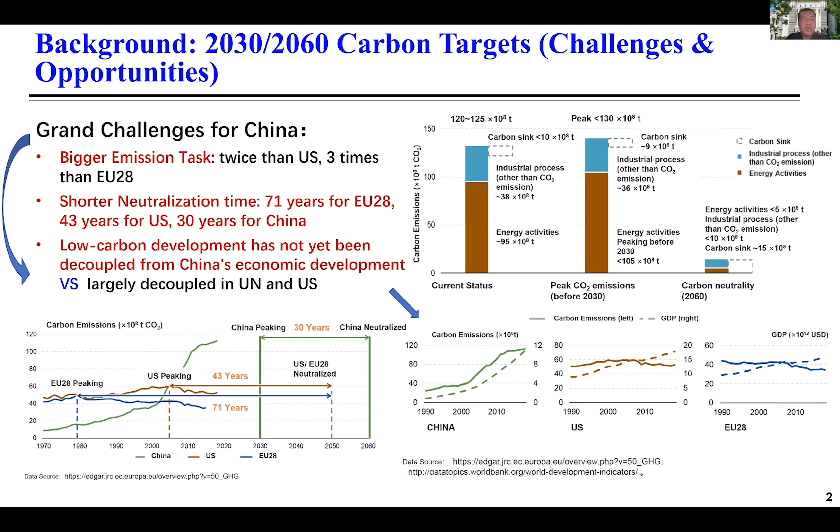The second challenge is the health and pressure issue. Due to the COVID-19 pandemic era, this has become a top trigger for the global building industry, and IEQ plays an important role in human health. Even now, Omicron is still an important issue for us.

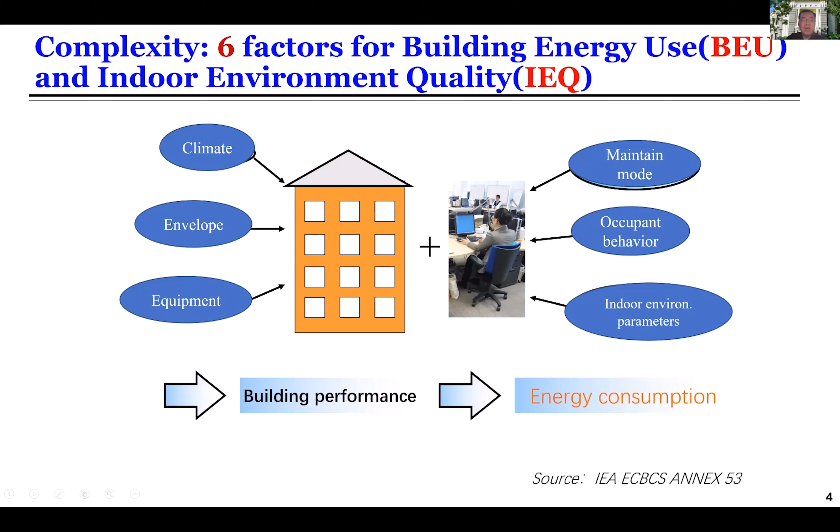So with these two targets, if we consider building energy use as well as indoor environment quality, it's a very complicated problem. With the IEA Annex 53, there are 6 factors, including climate, envelope, equipment, maintenance mode, occupant behavior, and indoor environment parameters. But in fact, it will be more complicated.

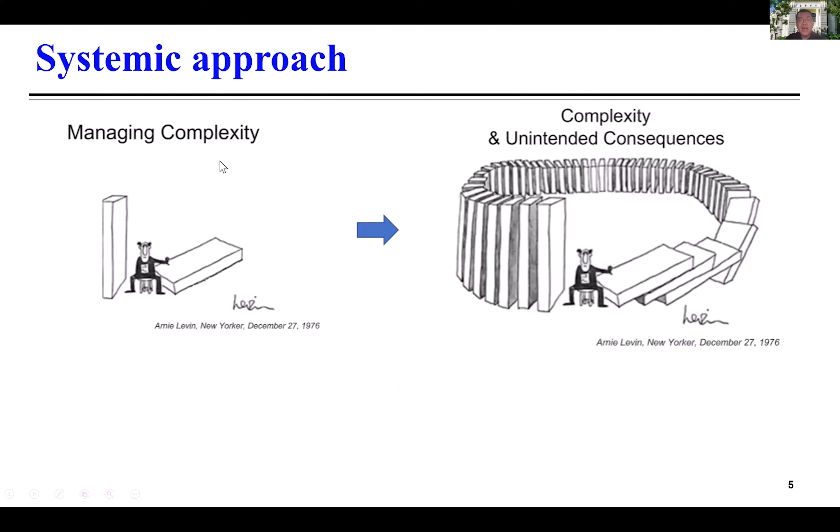So maybe we need a systemic approach. We need to manage the complexity and consider the unintended consequences. We need scientific thought: every system must have a structure, and the system structure determines the system function. We need to use this idea to solve building performance issues.

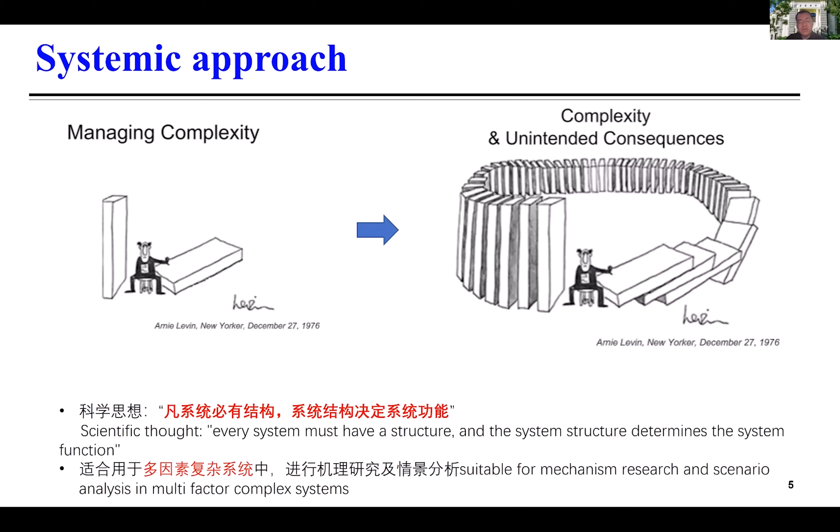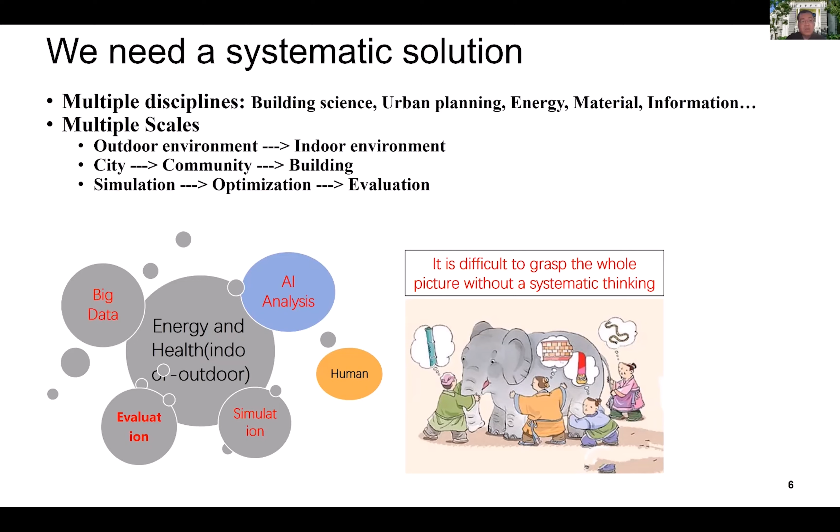So what we can get from new technologies: firstly is AI - advanced search engines and recommendation systems, understanding human speech, self-driving cars, and automatic decision making in the highest level strategic systems. Maybe we can use these advanced technologies to improve building performance from the beginning, from design to operation.

Secondly is big data technology. We can analyze the world based on massive data, which means maybe we can understand the behavior behind the data and understand how to optimize the performance in the operation phase.

The third one is sensor technology. The world is sensing at every moment. In the past 5 years, there have been more and more sensors to collect environmental data as well as energy consumption data, so we can use these sensors and data to optimize performance.

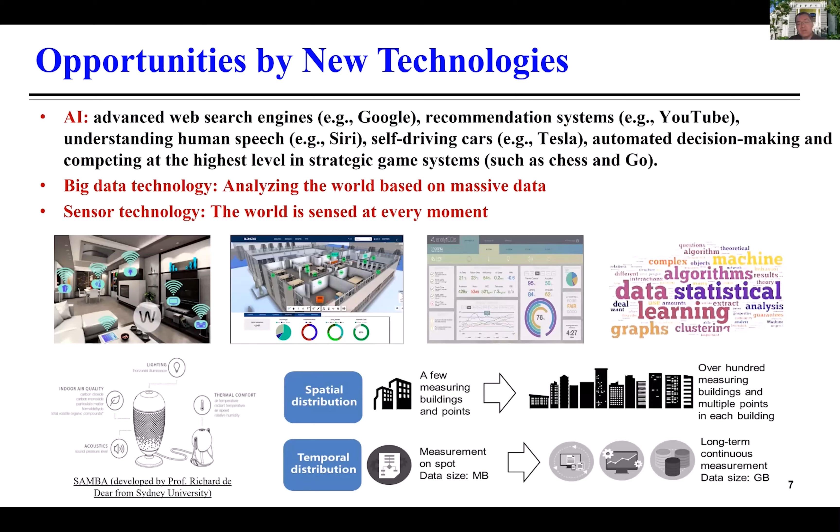With my team, there are some research findings supported by the government. First is green building design optimization methodology, algorithm, and platform, supported by the Chinese Ministry of Science and Technology. Second, we cooperated with UCL on a Tsinghua-UCL joint project supported by NSFC and EPSRC, on the topic of total performance of low carbon buildings in China and the UK.

The third one is research and application of post-occupancy evaluation of green buildings' actual operation performance, also supported by MOST. So today, what I want to show you is from building design to building operation, we want to introduce intelligent solutions to optimize performance with simulation, with AI, with data mining, something like this.

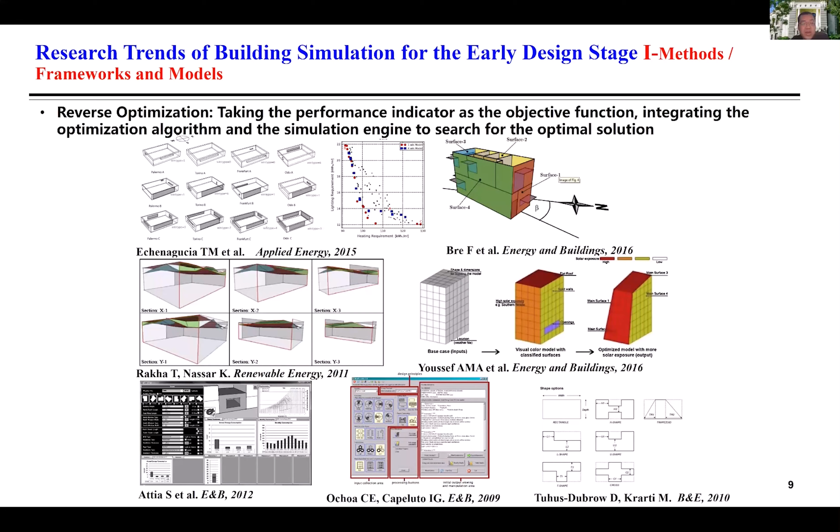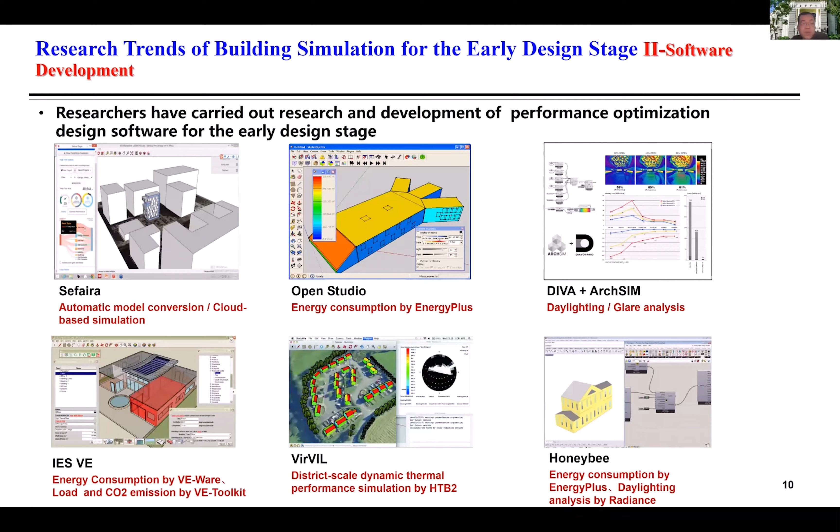That means simulation is integrated from the beginning of building design, the early stage. To summarize, for design, more and more architects began their design in SketchUp and in Rhino. There are many plugins for performance analysis integrated, and the conversion modes will change in the near future, and the requirement for hardware will be higher and higher.

However, we still think there are some challenges, such as how to trade off the fast uncertainty from the beginning of building design, and how to build a uniform design platform, something like this.

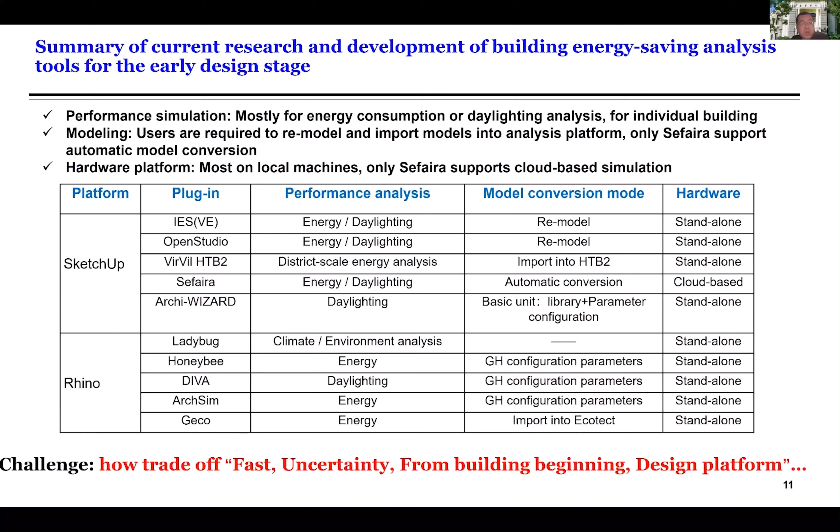So our research is, we think building model space recognition is a key problem. Considering current research, there are 4 types of algorithms. First is the graph and feature-based building space recognition algorithm. Second is the geometric calculation algorithm. Third is the algorithm based on domain-specific knowledge. And the last one is the transition from 2D to 3D.

We evaluated their performance from 2 aspects: first is accuracy, second is speed. With this understanding, we carried out our solution. That means to meet the big need for an algorithm that is good at both geometry recognition accuracy, as well as recognition efficiency.

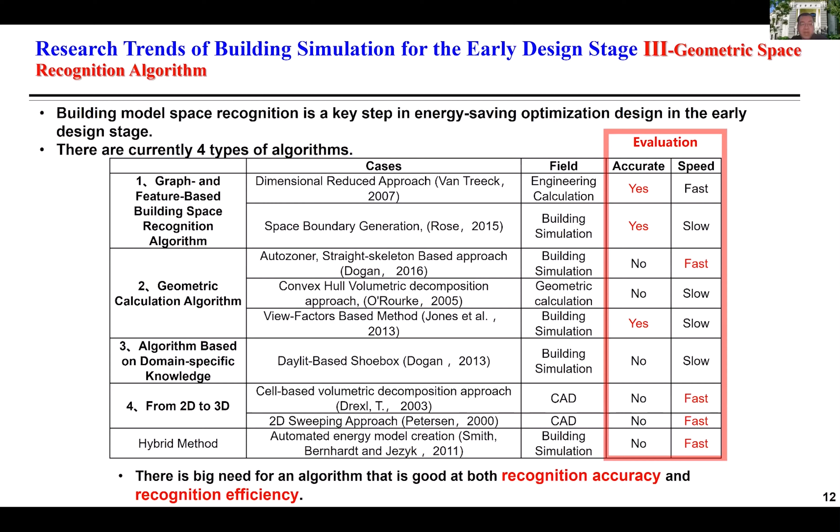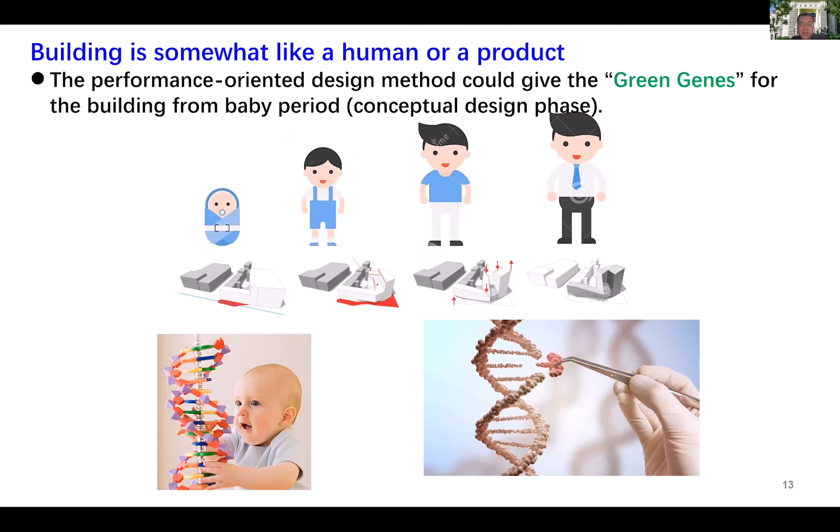With our understanding about building performance design, a building is somewhat like a human or a product. The performance-oriented design method could give the green genes for the building from the baby period, that means from the early stage, such as the DNA design. So what we want to control and optimize is the DNA of the building's performance.

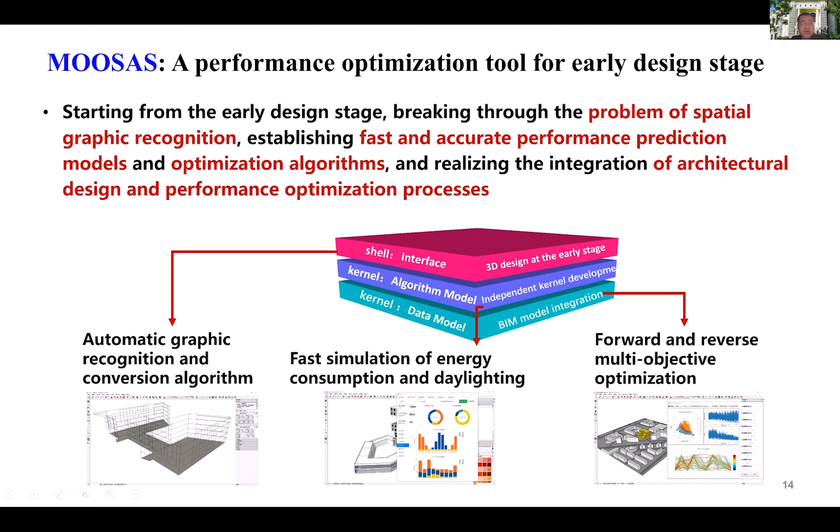So we carried out research to develop a software named MOOSAS. It's a performance optimization tool for the early design stage. There are 3 important features for MOOSAS. Firstly is the automatic graphic recognition and conversion algorithm. Secondly is the fast simulation for energy consumption and daylighting, and recently including ventilation. And also there is reverse or forward multi-objective optimization approach. I just want to show you some main features.

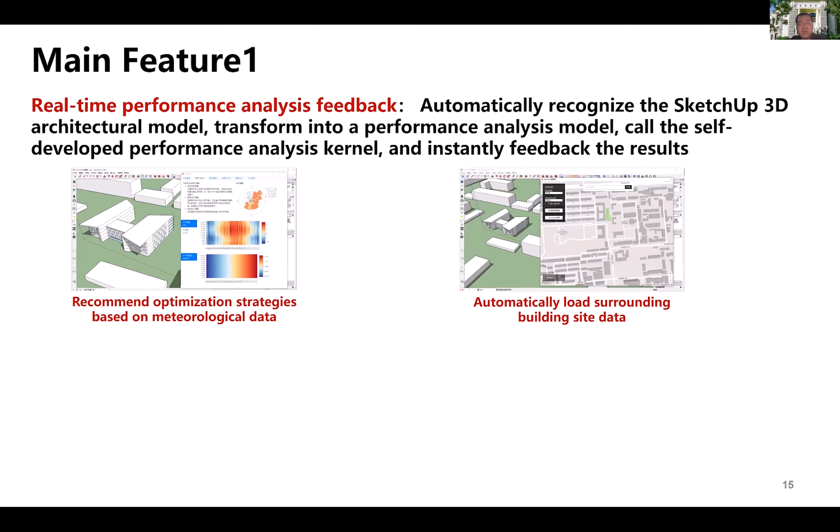Firstly is real-time performance analysis feedback. It can automatically recognize the 3D model and transform it into a performance analysis model, and also finish the automatic simulation. Finally, there is real-time feedback of energy consumption, lighting, and ventilation, and so on.

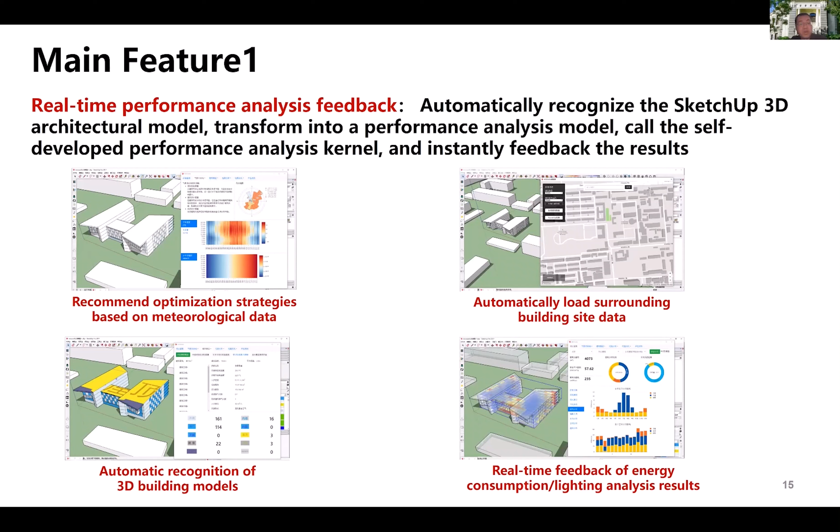The second feature is we realized a reverse optimization method at low energy consumption. That means using the energy consumption index, such as less than 50 kilowatt hours per square meter per year, and also give some thermal comfort indexes as well as daylighting indexes.

We can use this target to carry out parametric design. We define a function and use this function to generate a lot of possible forms, integrated with the envelope performance as well as the mechanical systems performance. So finally, we can generate a lot of possible schemes to meet these targets, and then architects can carry out simulation with this basis.

Here, what we introduce is a very interesting algorithm, the multi-island genetic algorithm, to help us optimize better schemes, just like DNA, just like genetic coding methods.

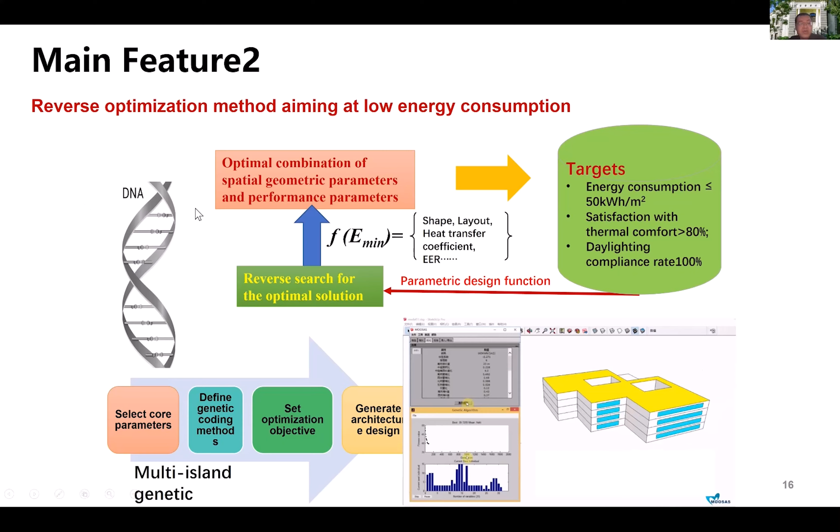Here we introduce 34 parameters in special fitness penalty control. Just like DNA, we can determine user-specific parameters genetically encoded in the generated architectural forms. This is some examples for you.

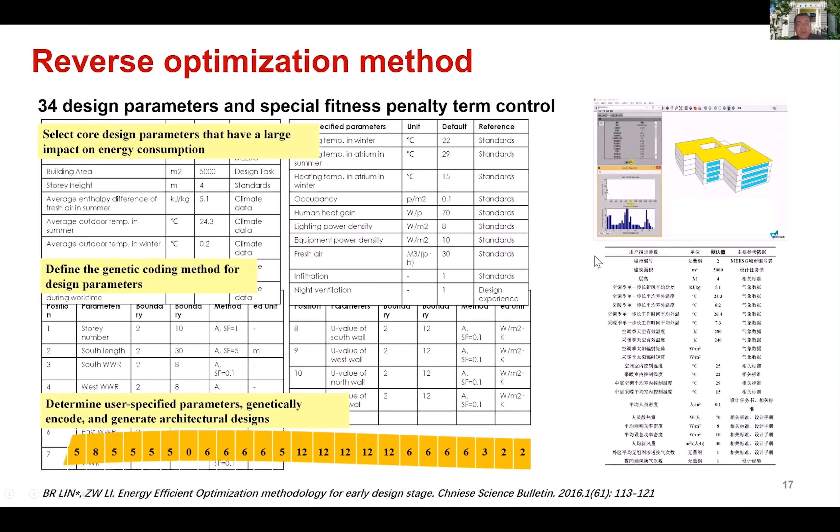A very important algorithm is the automatic recognition and conversion of 3D architecture models. We developed an algorithm based on filtering and fuzzy matching. It can very easily recognize very complicated faces with very short time consumption. Based on traditional space aesthetic creation, we realized the optimization integration of space design and energy saving.

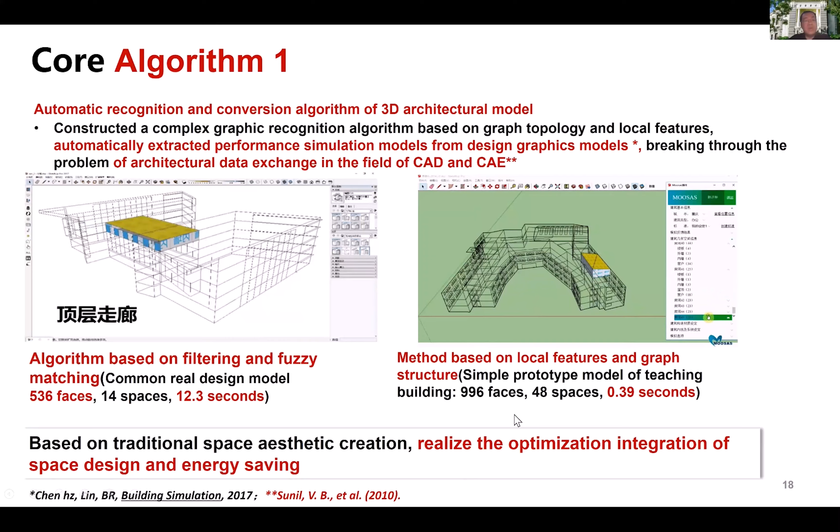This is an example, a very complicated geometry. We can quickly recognize the component with less than 1 second. We also carried out some comparisons with other software, such as Sefaira and Rhino, in the web platform. We think our algorithm has some advantages compared with them.

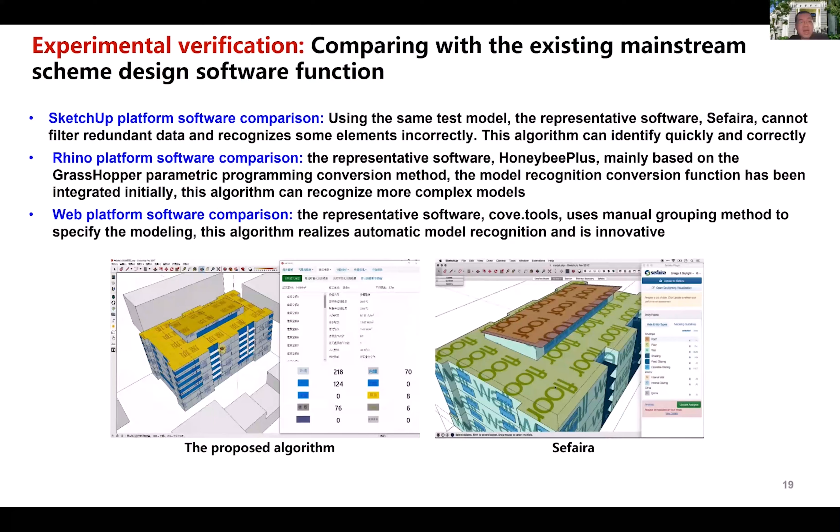The second algorithm is a faster predicting model for building heating, cooling, and lighting load, compared with the ASHRAE 140 requirement. With these cases, we think our accuracy is good, and the time saving is more than 50%.

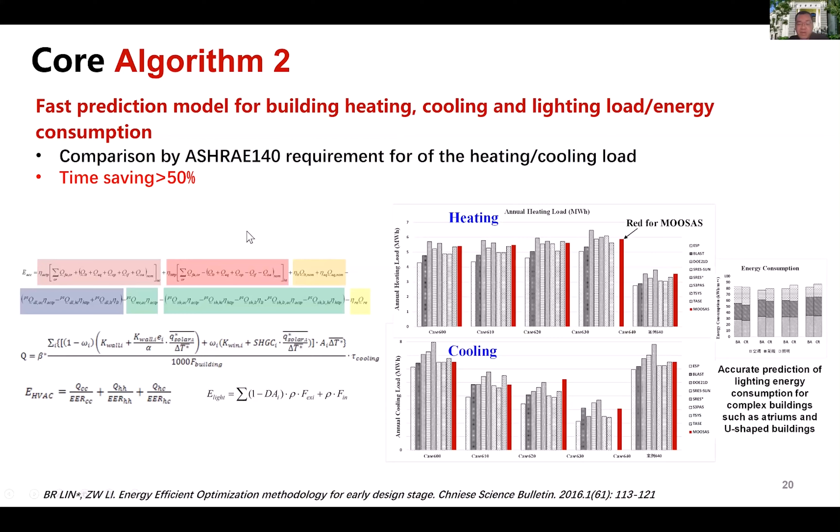The third algorithm is the PSGA algorithm. We find an optimal shape quickly at the early stage. We independently developed the PSGA algorithm to achieve a high preference satisfaction rate with high convergence efficiency. This way, we can ensure the diversity of optimization results within a very short period.

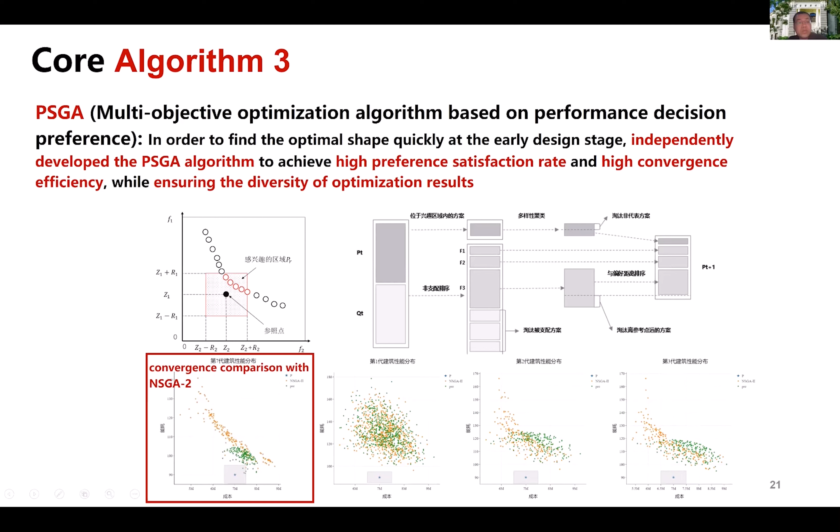What I'll show you is some cases. With this cascade shape, if we want to keep energy saving at the lowest level, and also control the initial cost as well as the operation cost, we can use PSGA to help us realize the diversity of schemes, and it can very quickly realize the optimization to meet our 10 seconds target, because the satisfaction rate is more than 6 times the old one.

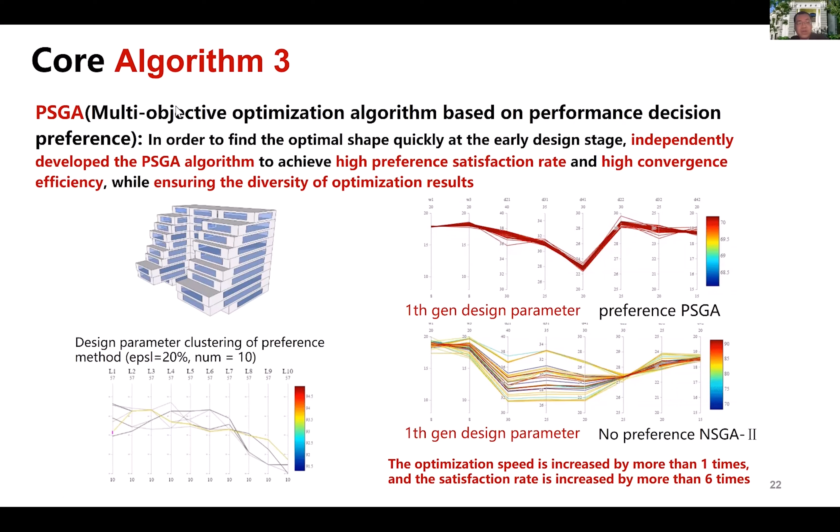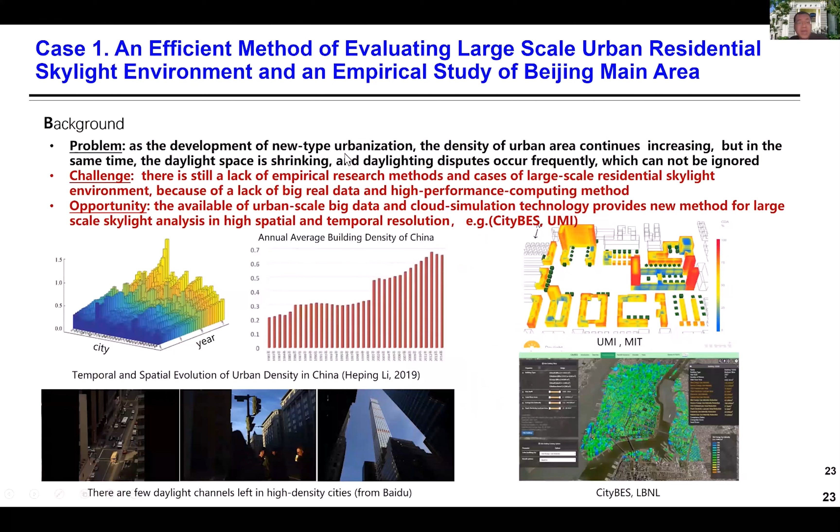Also, I want to show you some cases with this intelligent design approach. We can carry out an efficient method to evaluate the large-scale urban residential skylight environment. There are some problems, challenges, and opportunities. What we did is collect big data of the building geometries, residential boundaries, and POIs in Beijing's main area, and also carry out an approach to automatically retrieve all the building geometry by cloud technology.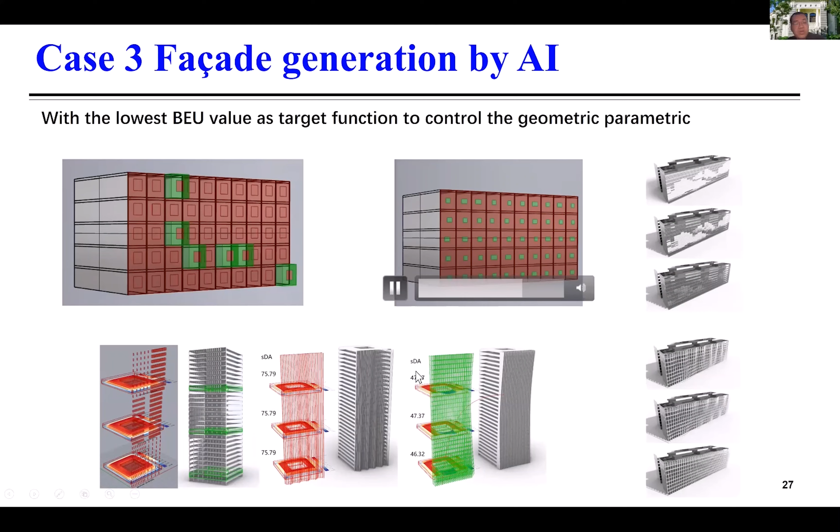We also introduced a daylighting and ventilation performance faster simulation approach using CNN and GAN. With this approach, the time consumed is less than 1 second compared with the traditional method, which is more than 10 or 20 seconds. Also, the structure similarity index measure is more than 90%.

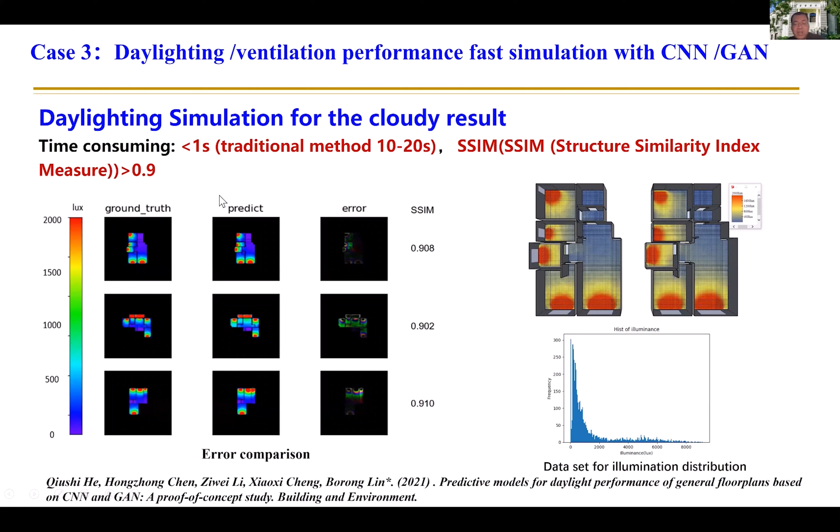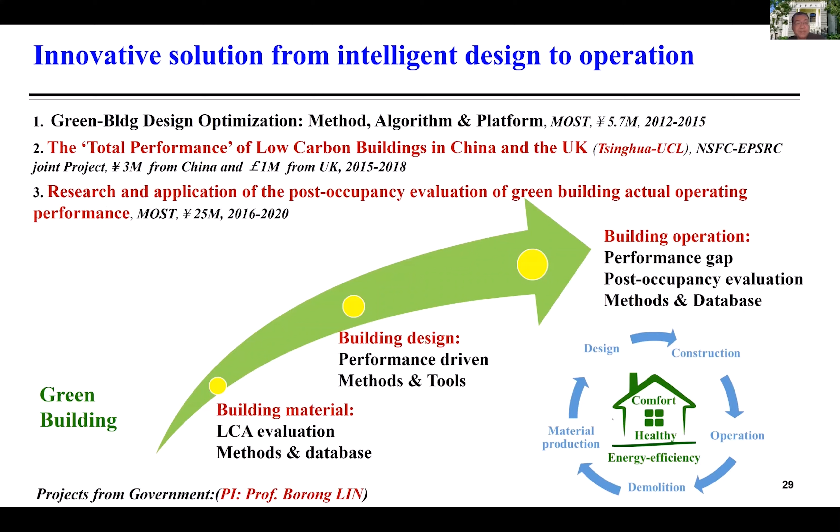The second part I want to show you is operation with big data. With the traditional problems, our solution is sensing, understanding, control, and feedback. Sensing means we develop special sensors to collect the data efficiently. Secondly, we understand the environment performance with a two-dimensional approach. Finally, we use the data mining approach to optimize the control algorithm.

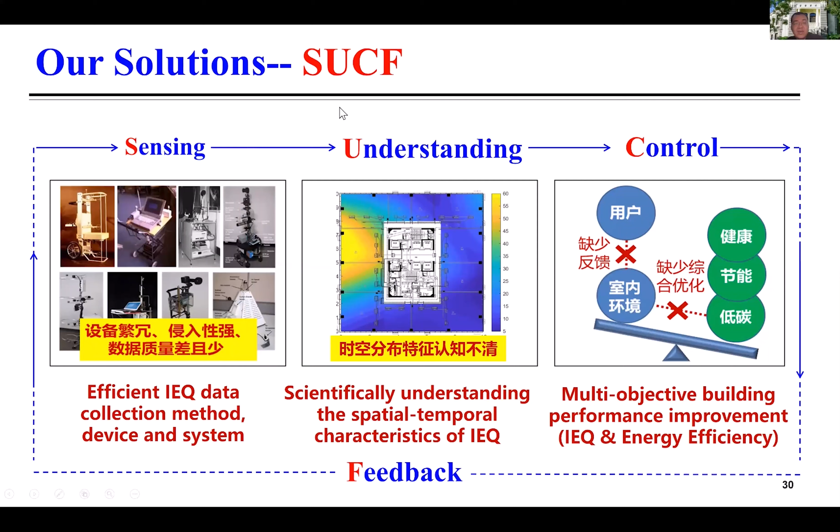Firstly, is the sensing, the sensor for data collection. We developed an iBEM, an intelligent monitor. It can integrate temperature, relative humidity, CO2, PM2.5, and illumination, and other parameters into a very small device, which can help us transmit data to the cloud through Wi-Fi or 3G.

These sensors went through thermal interference simulation. We also finished hardware optimization, calibration under the national standard, and obtained certification from a third party.

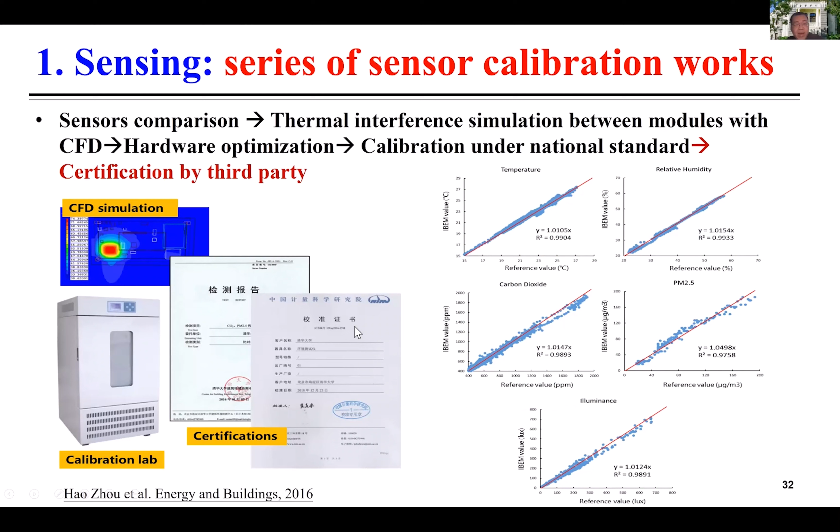With the web plus mobile platform support, we can carry out data query, download, evaluation, and feedback, realizing the right here, right now collection of subjective votes along with objective parameters at the same time. We use WeChat and other social media tools to help us collect this data.

Now this sensor has been installed in more than 200 buildings in 31 cities in China and internationally. Through long-term data collection, we've realized a dataset of more than 1.5 trillion data points.

Especially, this sensor was installed in hospitals for the COVID-19 security study in 2020, installed in 8 hospitals in Wuhan and Beijing for early warning of COVID-19 risk.

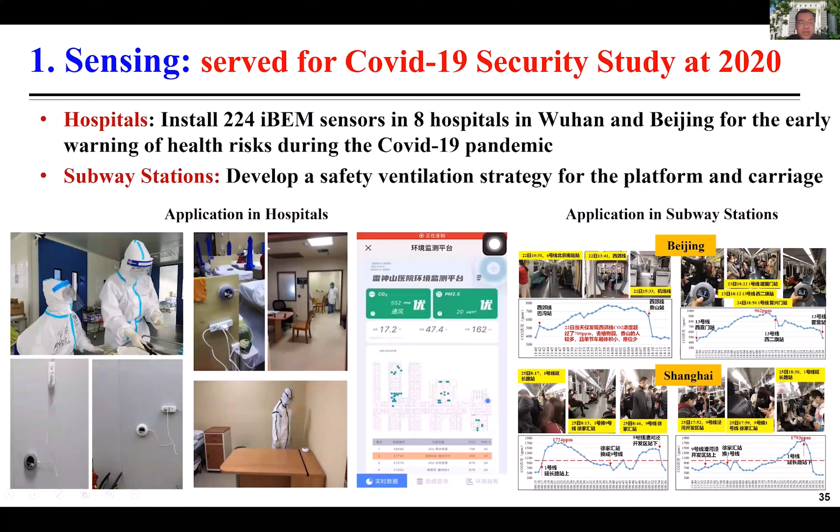Also, with this data, we can carry out a national level comparison to understand the IEQ performance and mechanism. We revealed the overall IEQ performance of green office buildings in China based on the big database. We can carry out the summer performance for different climate zones: the cold zone, the hot summer and cold winter zone, and the hot summer and warm winter areas.

And we can compare the IEQ issues in different seasons: summer, winter, and the transition seasons.

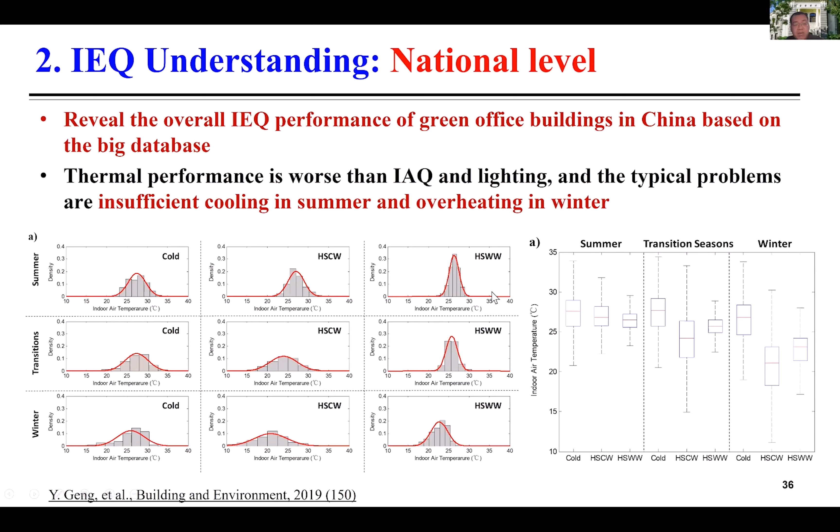Also, we can build an understanding of the IEQ at the building level. We use spatial tools to build a 2D environment distribution, changing hour by hour, such as this. This is for CO2, changed hour by hour, and this is for PM2.5. With this approach, we can easily find the problems for CO2 control and PM2.5 control inside buildings.

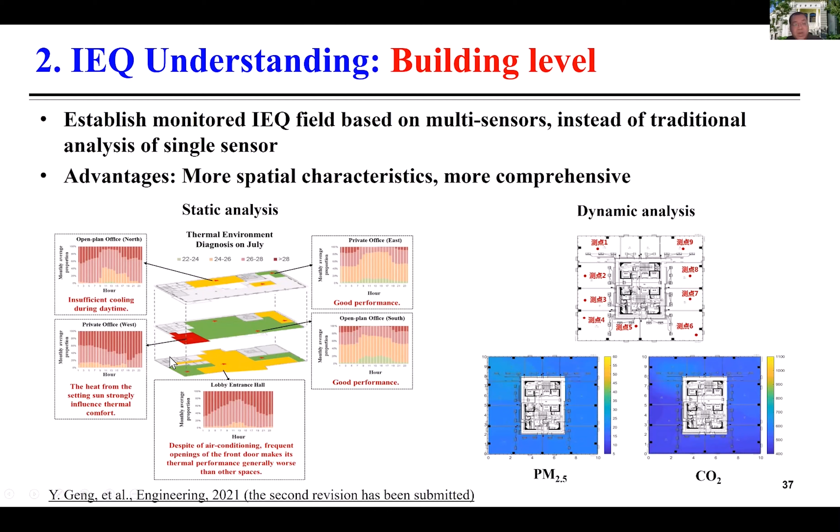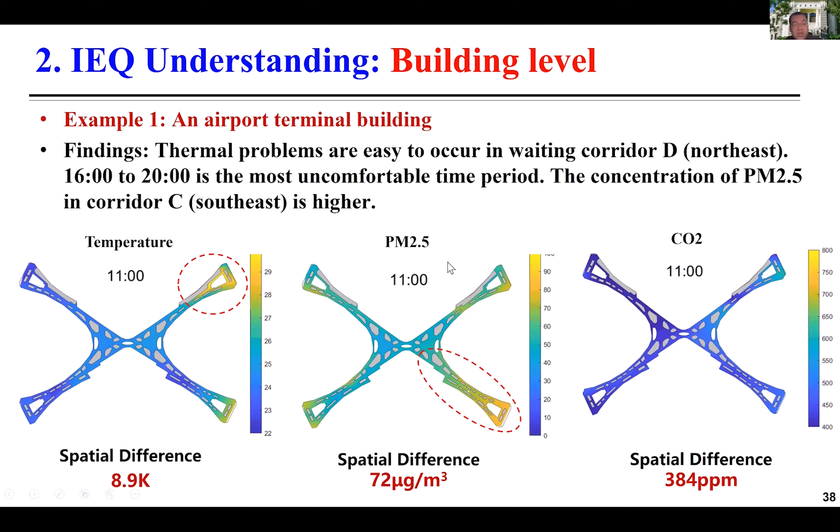Due to the COVID-19 pandemic, we installed these sensors and used this approach to analyze possible security in these areas. So we can very easily find the problems for PM 2.5 control, as well as CO2, temperature and humidity. With this comparison, we can find if the indoor space has enough fresh air support or not.

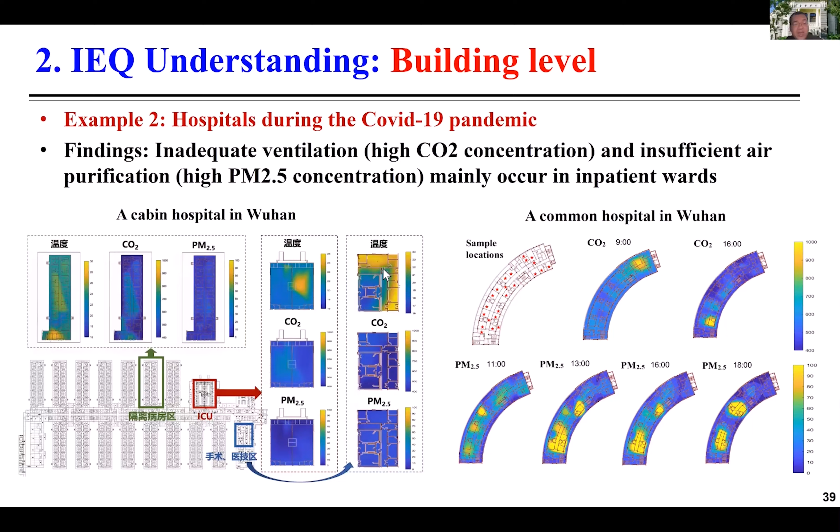We can also carry out daily pattern recognition with massive time-series data. With these massive daily curves, we use feature selection based on professional knowledge and classify this data to use these class curves for future control.

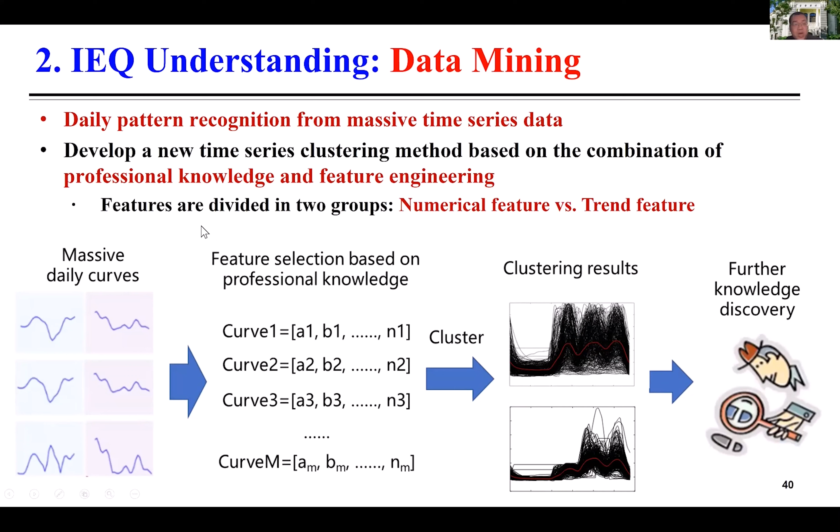We use 5 daily curves to realize the typical pattern for different zones, recognize their performance, and find the zones if they have poor thermal performance or not, then give the control principles for the HVAC systems and realize performance improvement.

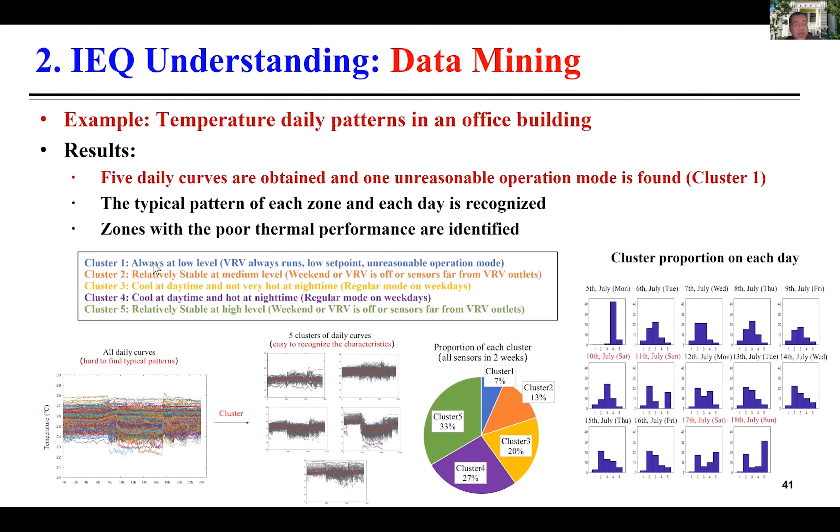We also compare the performance for different algorithms, such as ANN and long short-term memory (LSTM). With this comparison, we can give some guidance for algorithm selection for real projects.

We also integrated occupant positioning plus camera and Wi-Fi technology. With this technology, we can realize 1 meter accuracy to position the occupant.

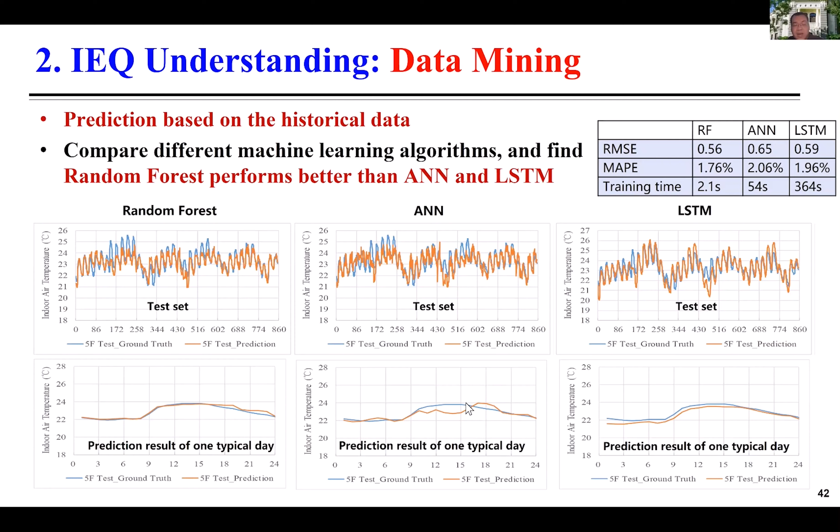We can also compare the occupant positions as well as the environment performance, the environment parameter changes overall. This technology will also help us optimize the system control in real cases.

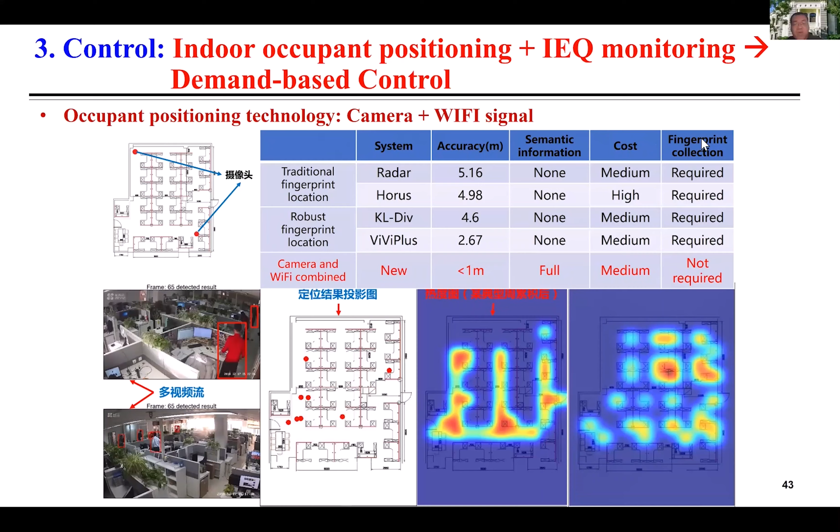We also developed an approach with real-time location plus real-time IEQ plus real-time vote. We realize smart control using cloud-side IEQ to obtain the control strategy. So we can use the sensor plus mobile phone to transmit data to the cloud, use cloud simulation to optimize the real performance, and get the subjective vote from the occupant to realize smart control.

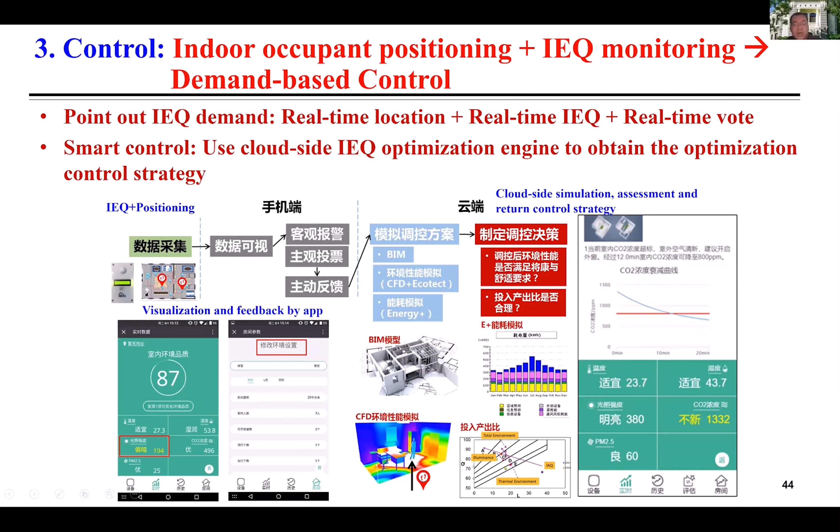This approach has been applied in Shanghai Hongqiao Airport Terminal 1. We realized energy saving for the IEQ, especially for fresh air supply and daylighting control in the HVAC system energy saving. Generally it's about 60% energy saving, and the IEQ satisfaction rate was improved by more than 85%.

There are some images for the sensors installed in the airport.

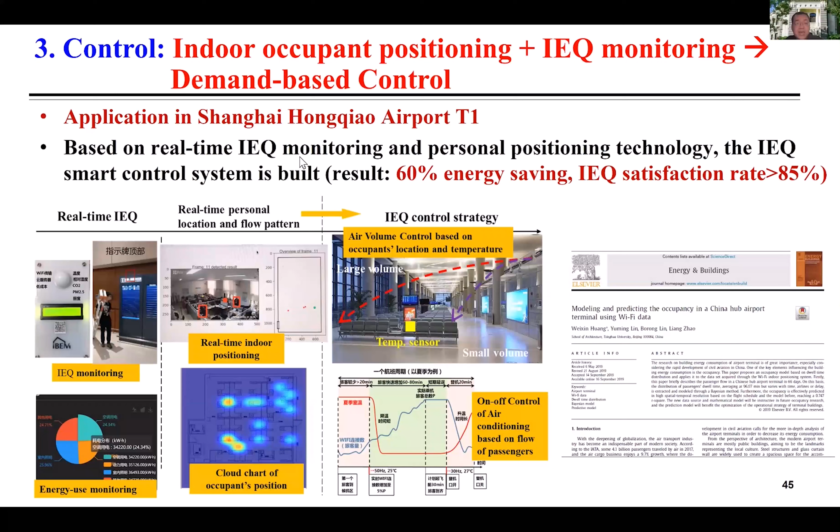Due to time limits, what I want to show you now is a summary. I think we need smart cities in the future. Also, due to the 30-60 carbon neutrality targets, there are more and more energy saving and carbon reduction pressures from the government. So due to these restrictions, we need to use intelligent design as well as smart operation approaches to realize building performance improvement in the future. From design to operation, what I want to show you is our approach over the past 5 years.

I hope in the future we can use this approach more and more in real projects, and hope for more collaboration and communication with you in the future. So that's my talk, thank you.